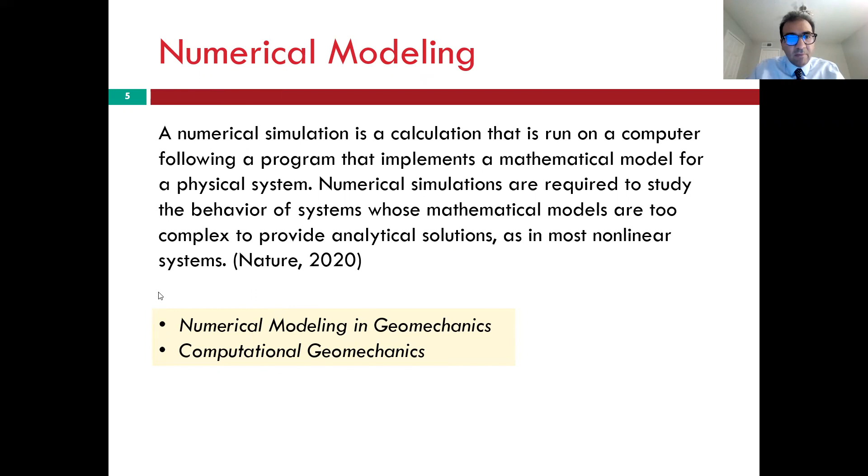So numerical modeling is basically computer simulation. So using computer programs to simulate a physical system, and then by simulation of that physical system in computer, we can study the behavior of systems and proceed with some types of analytical solutions. Once we are talking about numerical modeling, specifically in geomechanics, sometimes we also call it computational geomechanics. So all of them follow the same procedure and methodology.

So once we discuss numerical modeling, we mostly deal with three aspects during any investigation. The first aspect is the physical system. The physical system is the actual realistic system that we are interested in modeling, for instance, an underground reservoir or a wellbore. Then we have the mathematical system. The mathematical system uses mathematical equations, closed-form solutions to predict the behavior of any physical system

and any physical component. And then we have the numerical system that, as we mentioned, uses computer simulation for studying and analyzing a physical system. And the application of numerical modeling, we can categorize into three different areas. In general, we use numerical modeling for interpretation of a system. So study the system and provide interpretation of its behavior. We can use it for design, obviously. So let's say design of the wellbore.

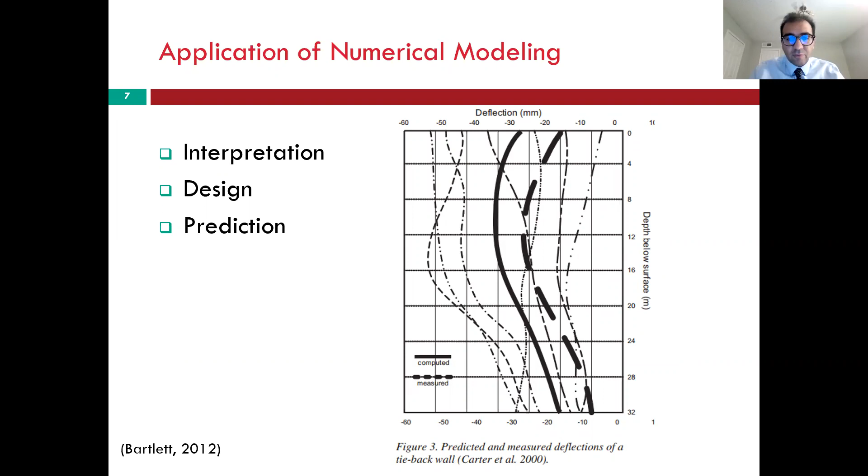And one of the things that we need to understand and make sure that we consider is the idealization of field conditions in numerical modeling. So in many cases, obviously, any field model, any realistic model, has a variety of complexities. The reason is because we live in a world of complexity. We live with complex systems. And therefore, we need to deal with these complexities, obviously.

So for dealing with these complexities, we need to use some level of idealization once we want to do a numerical model, because we are not able to develop a system that fully models the whole complexity of the system. So to some extent, we do some idealization.

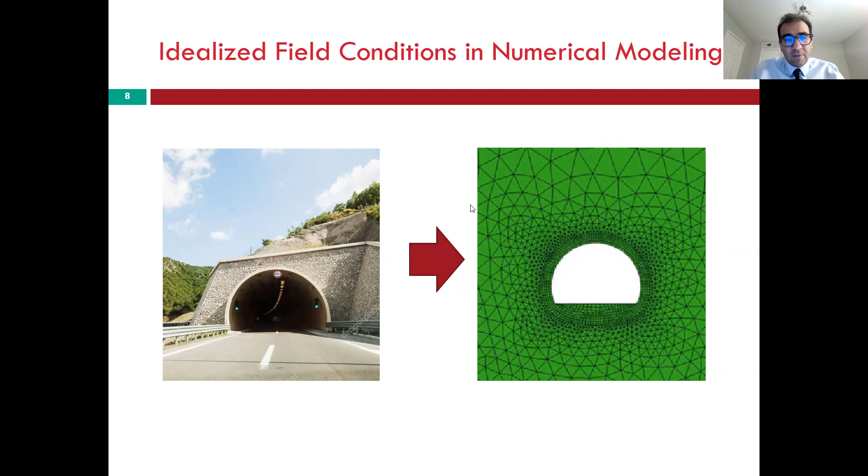So the goal of this seminar is to provide a brief overview of using these numerical modelings for geomechanics simulation. Obviously, we are not going to get into details of all these different types of procedures, and the topics that we are providing in this seminar are very, very broad and extensive, and obviously we cannot fit the whole subject into just one seminar, but we just try to get a feeling of these different methodologies and approaches for geomechanics simulation.

So in any case that we want to run a numerical modeling for the geomechanical simulation, we have different steps for that. These steps start from the idealization of the field condition, as I mentioned, and then choosing the numerical method and the program, the computer simulation tool that we want to use for that.

Then we need to develop the geometry of the system. And after developing the geometry, we'll develop a constitutive model. That's a model that represents the physical behavior of our system. And then assigning material properties to our computer simulation. Then any loading or boundary conditions should be applied. Initial conditions are applied. And then if we have any alteration, for instance, some type of extraction or drilling, that can also be applied in the computer simulation.

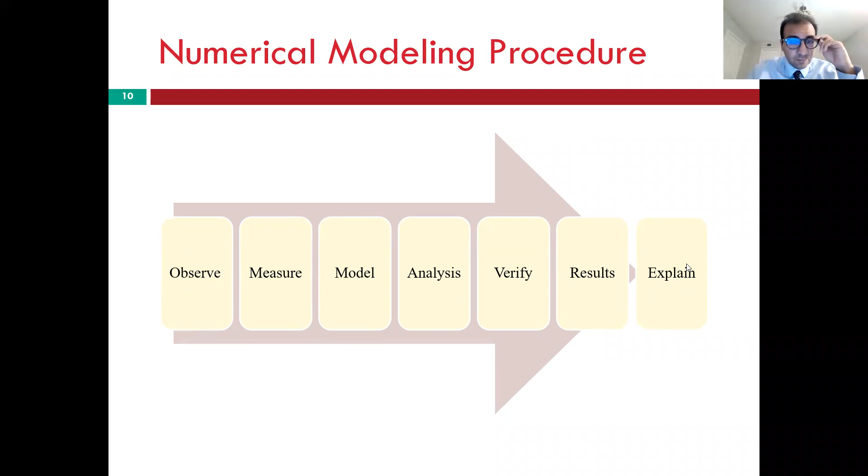The way that I organize these slides and this seminar is based on the procedure that I discussed here as well. So first, I'm gonna provide a brief review of different methods and programs that are available. Then I will talk about the geometry development and tools and methodologies for that. Then I will talk about constitutive models and some typical types of models for geomechanics simulation. And then I will provide some real case examples where these modelings have been done, providing some results that we can expect from any numerical simulation.

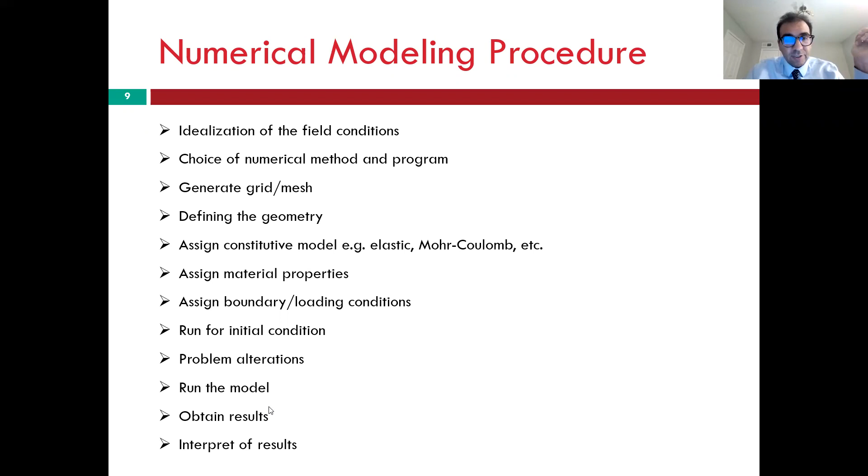So the first thing that we talk about is the methods and tools. Again, as I mentioned, this topic is very broad, and I provided here just the most important ones, but obviously there might be additional methods and tools that will not be addressed in this seminar. So don't expect all the different methods to be provided here. Our focus is more on geomechanics simulation, and as I will discuss, my main focus will be on some types of computer programs that are mostly used by geomechanics engineers and geotechnical engineers.

So firstly, let's talk about the methods, and then I will discuss the programs that are developed based on these different methods. The first method is the finite element method. This is the most common method that is used for computer simulation, not only for geomechanics, reservoirs, and media, but also for other engineering disciplines, from structural engineering, mechanical analysis, to biomedical engineering, to soil mechanics, and all different aspects of engineering disciplines.

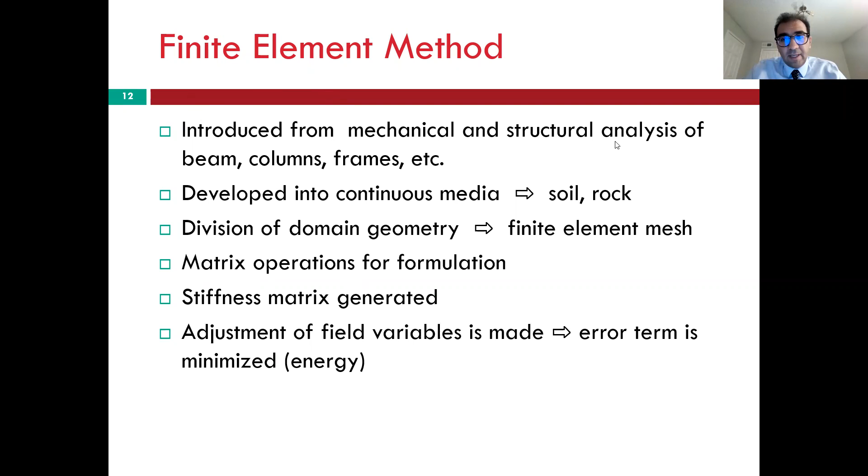The basis of the finite element method is developing the stiffness matrix of a system, and then by force equals stiffness times displacement, and by doing the matrix calculation, we can analyze and determine the amount of displacement of a system by applying the force to it. So that's the classic methodology for numerical modeling of any system, as I mentioned, from structural components to geomechanics media.

The procedure would be very similar to what I discussed for numerical simulation. So again, we'll have the geometry, material, boundary condition, loading, and solution. And once we develop the finite element model, our whole model will be divided into small elements. And then during the computer simulation, each of these elements will get a stiffness matrix, and calculations will be performed on each of these elements as a whole model.

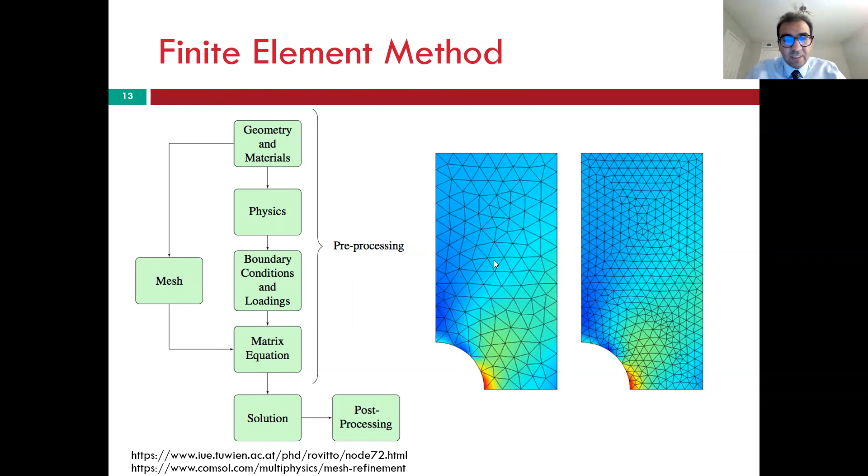One of the other methods that are more used in geo environments is called the finite difference method. That is an older and simpler technique than the finite element model. It does not include matrix calculations, and it is based on equilibrium equations between stresses, strains, and displacements.

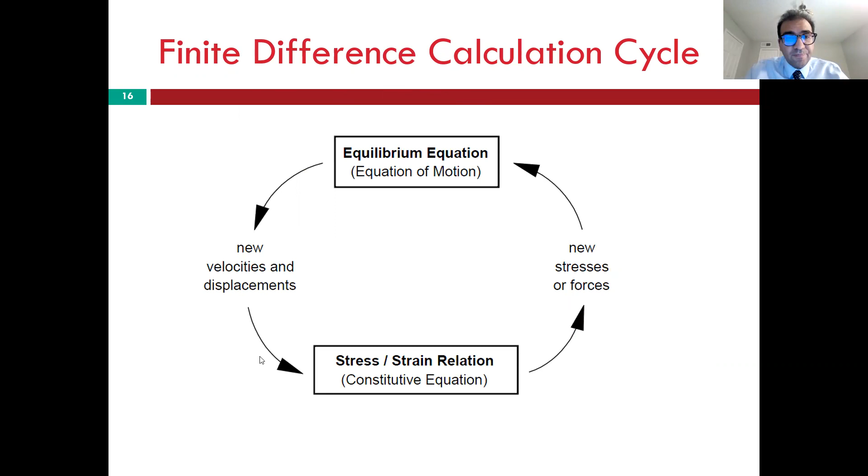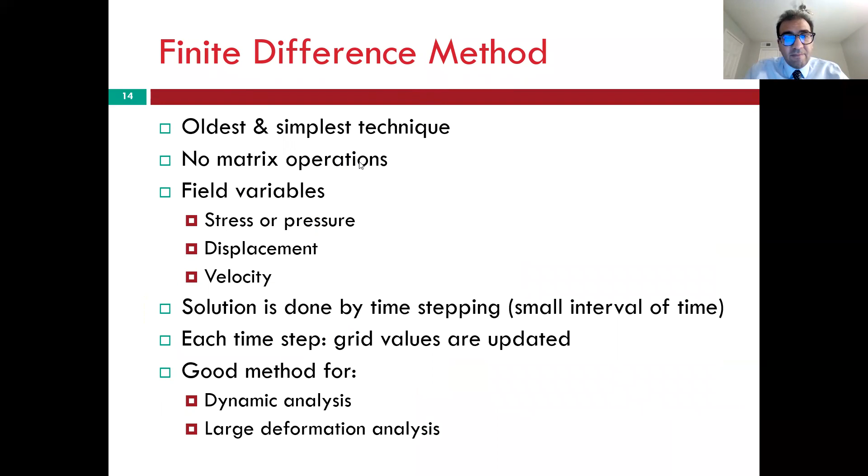One of the advantages of the finite difference method over the finite element method is that in the finite difference method, because we don't have the matrix establishment, the amount of movements and deformations that can be tolerated in the model, considering the computational time, would be higher. So although we'll have larger deformations in systems, the computational time would not be affected considerably.

That's in contrast to finite element models, where in large deformation models the computational time increases as well. So we know that in geomechanics environments, in soil and rock environments, we might have extensive deformation. And for that reason, the finite difference method would be an idealized solution for geomechanics modeling.

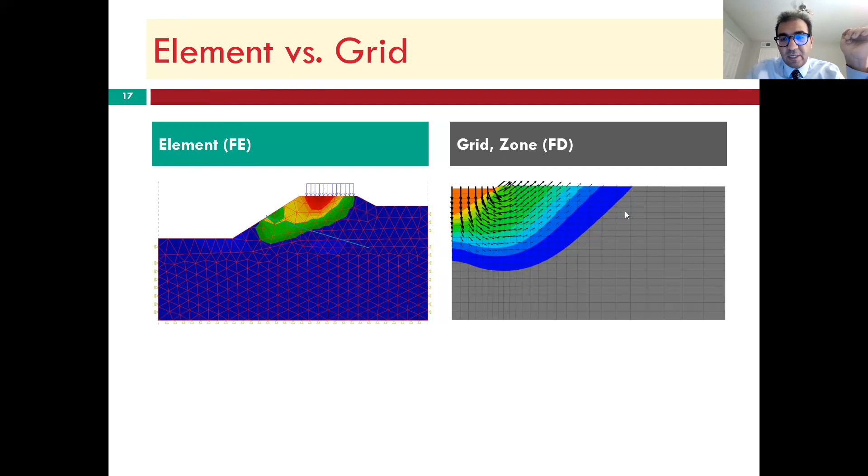And then in the finite difference model, we also have those elements, as I mentioned, in finite elements. So a finite difference model is also divided into smaller elements, and each of those elements will be analyzed in the computer and investigated in the model. However, in the terminology used for finite difference, we mostly call them grids or zones. In finite element, we call them elements. But still, elements and grids are components of a model in both FE and FD modeling.

The third methodology that is extensively used in geomechanics modeling, and more specifically in mediums that are jointed and fractured, is called the discrete element methodology. The discrete element methodology is also called the distinct element method. So this method consists of modeling blocks of materials that are separated by fractures and joints.

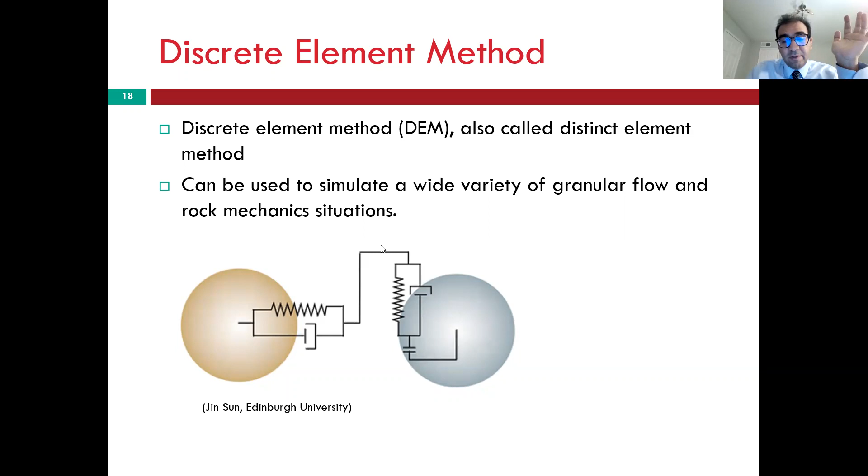And the procedure for the interaction of these elements along those joints or fractures is based on the stiffness, based on the springs and dampers that connect those different blocks or elements together. And by these springs and damper simulation, we can simulate the fractures and the joints between these elements.

Another categorization for the methods is called the hybrid methods. So hybrid methods basically include methods that combine the different methodologies that I mentioned, for instance, discrete element with finite difference.

So one important note here, comparing the discrete element with finite element and finite difference, is that in discrete elements, we mostly have jointed and fractured components between the elements. However, in finite element and finite difference models, the whole model consists of continuous material. We don't have fractures or joints in the model.

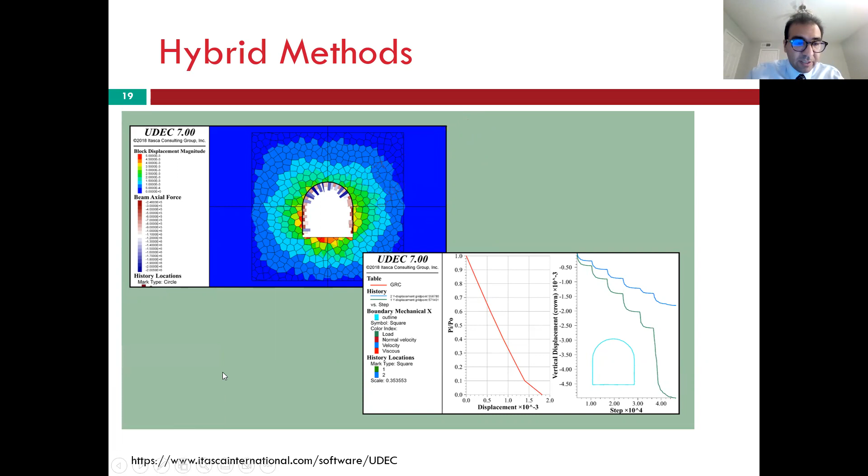We have elements, but these elements are just for computational application, and there are no fractures or joints at the boundaries of those elements. So that's an important distinction, and we'll discuss the applicability of these different systems.

So by categorizing the software packages that are available for geomechanics modeling, we provide a list of these available tools that can be used. I categorize them based on continuum modeling and discontinuum modeling. As I mentioned, discontinuum modeling consists of fractures and joints. And continuum modeling considers areas where we have continuous material without any fracture or joint. Finite element and finite difference both can be categorized under continuum modeling.

The available tools for continuum modeling for geo environments, like geotechnical and geomechanics usage: in finite element, we have programs such as Plaxis, SIGMA/W, Midas GTS, and RS. They are programs developed by different companies and entities. And then in the finite difference model, we have FLAC and FLAC3D as two powerful tools for that.

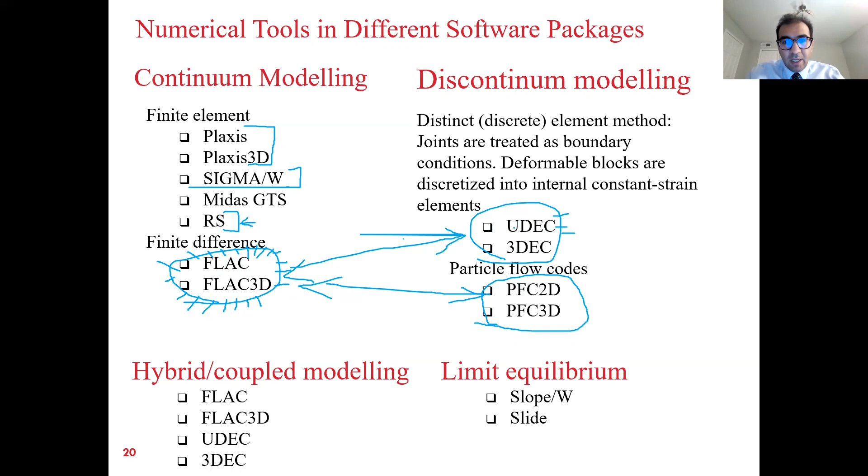And for that reason, in this seminar, I'm mostly focused on the programs developed by Itasca, and I will provide examples of geomechanics simulation and analysis with these programs. I will provide more information about FLAC and FLAC 3D, as well as UDEC and 3DEC. PFC I will talk less about, because it is mostly used for granular and particle analysis and is a very specific program, but UDEC, FLAC, and FLAC 3D are more common for geomechanics analysis.

So categorizing these Itasca tools, for continuous modeling we have FLAC and FLAC 3D. For discontinuous modeling, we have UDEC and PFC. UDEC and 3DEC are used for block modeling. PFC and PFC 3D are used for particle modeling. This is a nice and interesting overview comparing the different Itasca tools.

So let's just start from UDEC and 3DEC. As you see, we have these blocks of rock that are modeled, and the fractures between the rocks can also be modeled in UDEC and 3DEC. The difference is UDEC is a two-dimensional program and 3DEC is a three-dimensional program, so you can develop three-dimensional models with more geometrical complexity. PFC 2D and PFC 3D, as we see, are used for granular and particle analysis.

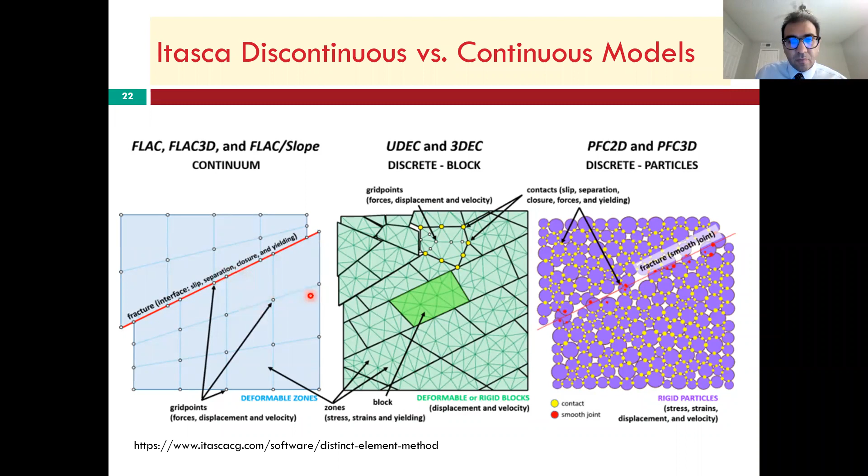Here is also an example in Itasca programs that I discuss here. There are options to combine the tools that each of these programs use, because obviously they have been developed by the same provider. So there are tools that you can use to couple these different analyses together.

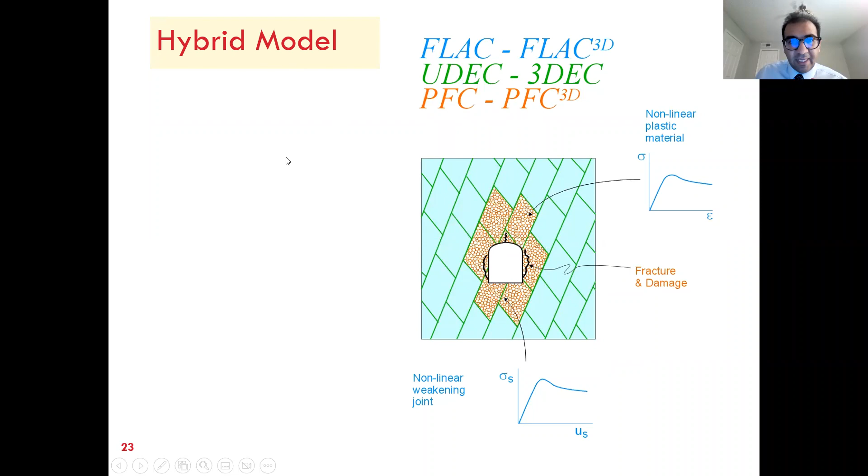Okay. So I provided the different categories and introduced these available tools for study. Now, I'm going to provide a quick introduction of FLAC, FLAC 3D and UDEC, and just provide the capabilities of these.

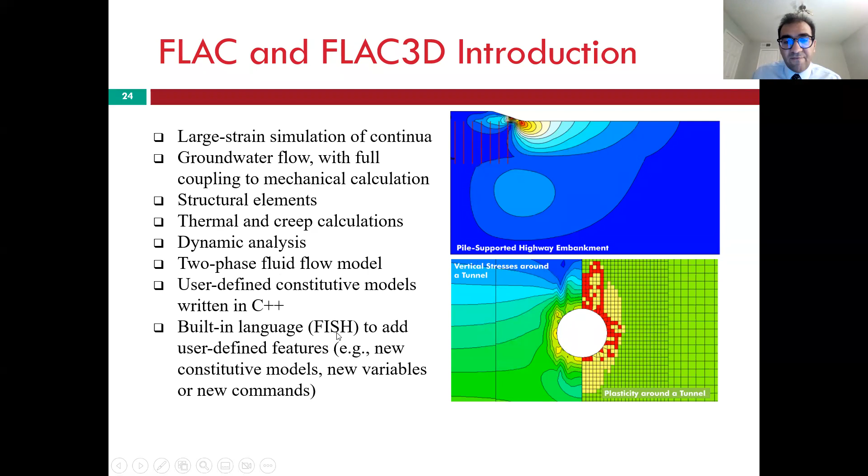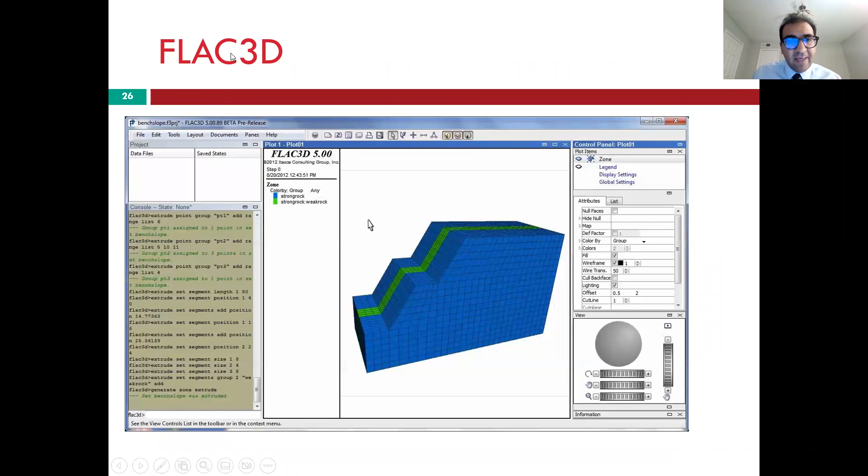FLAC, as I mentioned, has both two-dimensional and three-dimensional options. There are tools to simulate and analyze thermal and creep behavior. And for more user-specific calculations, we can also connect them with C++, Python or FISH programming languages to develop specific cases. Just an overview of the software for FLAC two-dimensional, and then FLAC 3D, where we can develop three-dimensional models.

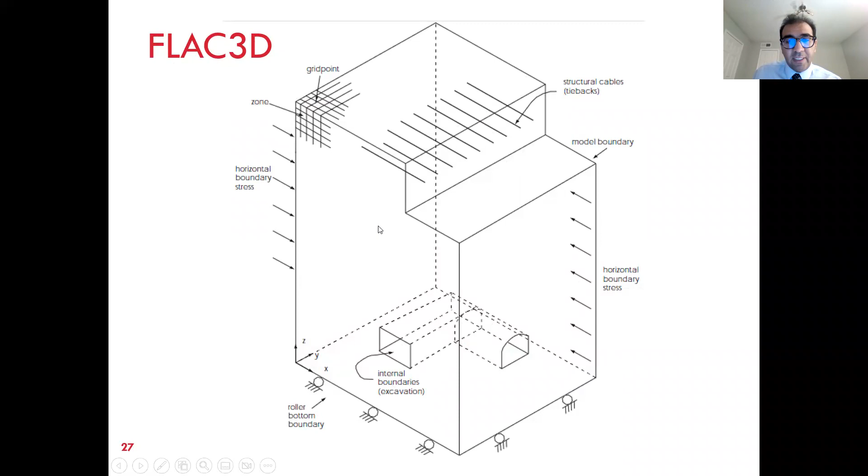There are a couple of different features that can be developed in FLAC 3D. As we said, the model is based on zones or elements. We have boundary conditions. We can have structural elements that can be used for any type of simulation. We have internal alterations such as an underground mine or a wellbore drilling inside a geomedium.

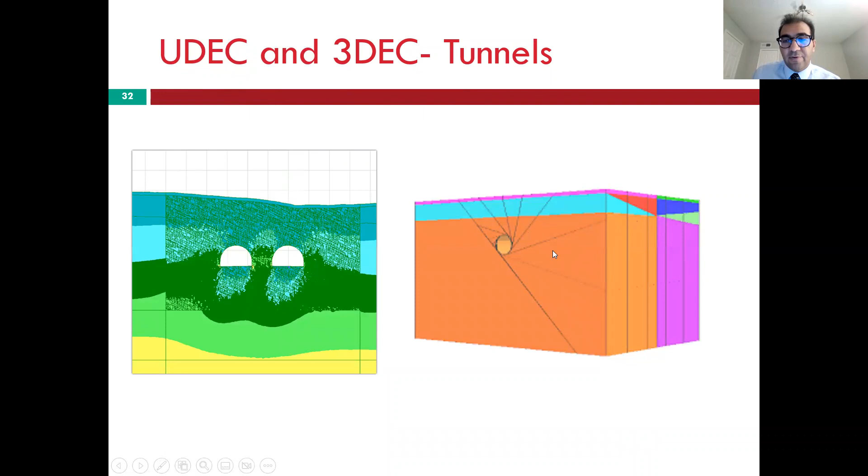Then UDEC and 3DEC, as I mentioned, are used for fractured components, and they have different capabilities, from geomechanics modeling to earthquake engineering to dams, foundations, etc. UDEC, as I mentioned, is a two-dimensional version. The environment is very similar to FLAC, and then 3DEC, I have it here. 3DEC is the three-dimensional version of UDEC, with which you can simulate systems that have fractures in them.

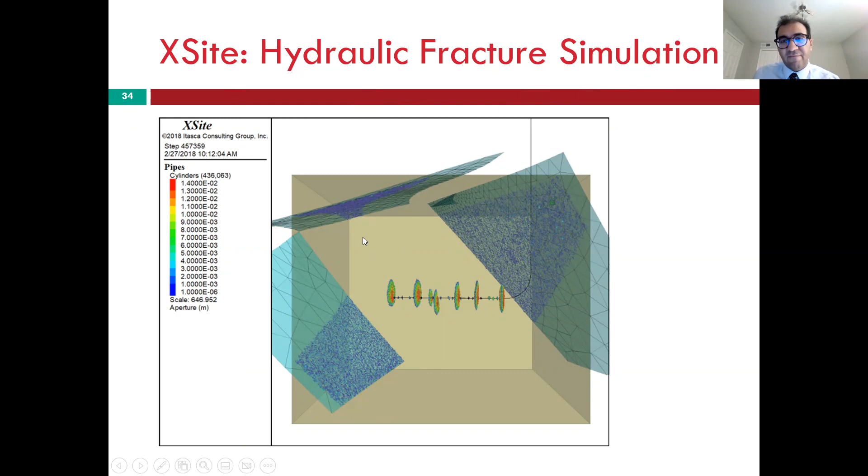PFC and PFC 3D, again, are for particle simulation. And then there is another program called XSite, also developed by Itasca, that is specifically used for hydraulic fracturing simulation. We can also use UDEC and 3DEC for hydraulic fracturing as well. I will discuss the differences of these two tools for hydraulic fracturing simulation, but XSite is specifically developed for the hydraulic fracturing case.

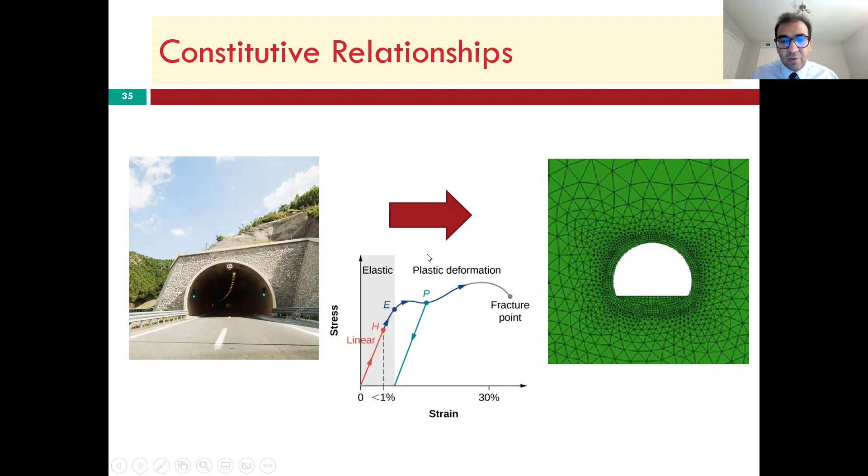Okay, so I provided the tools and the methods, and now if you recall the procedure for analysis, after choosing the tools, we get to the constitutive relationship, which is a mathematical model that we use to simulate a real material. So we have a real material in the world, such as rock or soil. And when we want to simulate it in a computer, we need to establish a mathematical relationship. That is called the constitutive model.

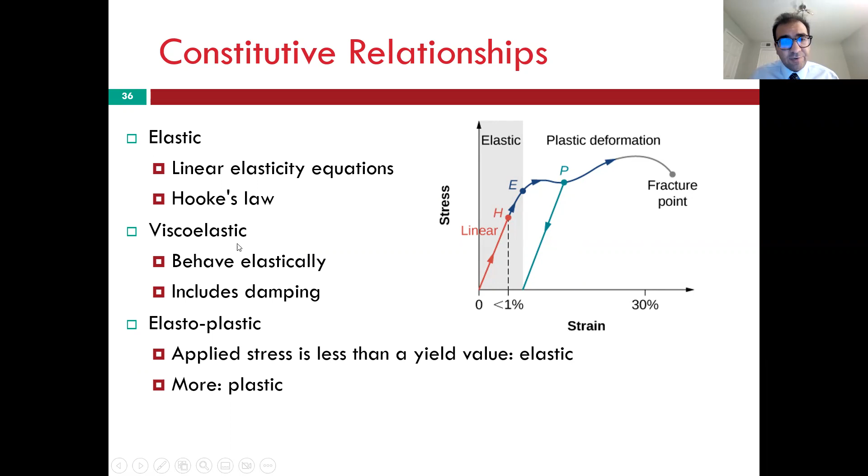Depending on the type of material that we model, we have categories of constitutive models: elastic, viscoelastic, and elastoplastic. And we have a wide range of constitutive models that can be used for geomaterials. Depending on the type of rock or soil that you are studying, you can utilize different constitutive models. One of the basic and common constitutive models used for soil and rock is Mohr-Coulomb. And then we have more specific constitutive models as well.

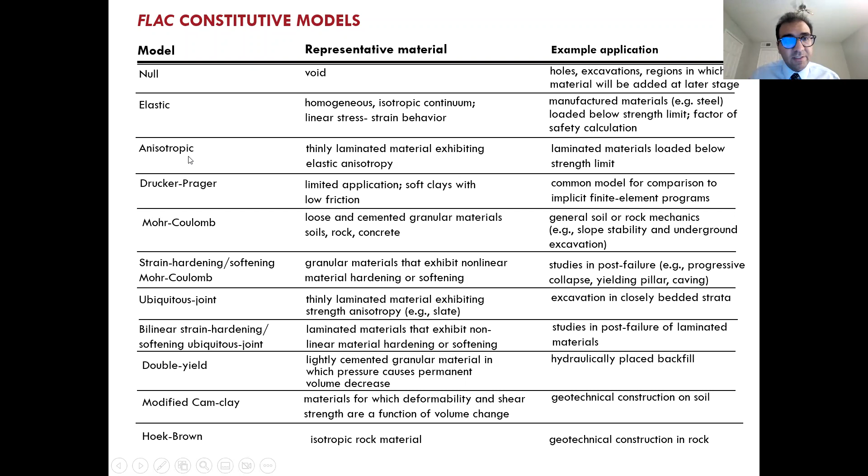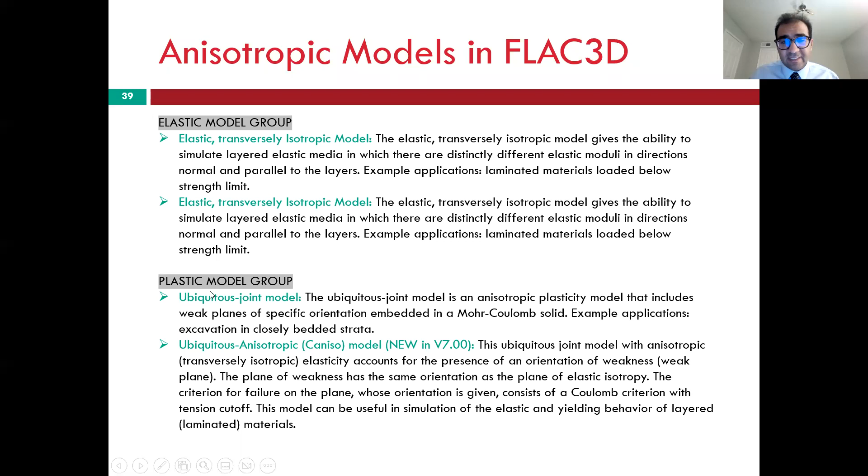One of the interesting things that we mostly deal with in geomechanics simulation, specifically for unconventional reservoirs, is the problem of anisotropy in the behavior of materials. So in FLAC and UDEC, we have constitutive models that can simulate anisotropic systems as well, in both elastic and elastic-plastic conditions.

The next thing that we deal with in computer simulation is the properties of the material. Properties are assigned based on the constitutive model that you choose and on the values you get from the field. Those can be results from testing of cores from the field, results of geophysical study and analysis, or other methodologies that we use to determine the properties of the different stratifications of the ground.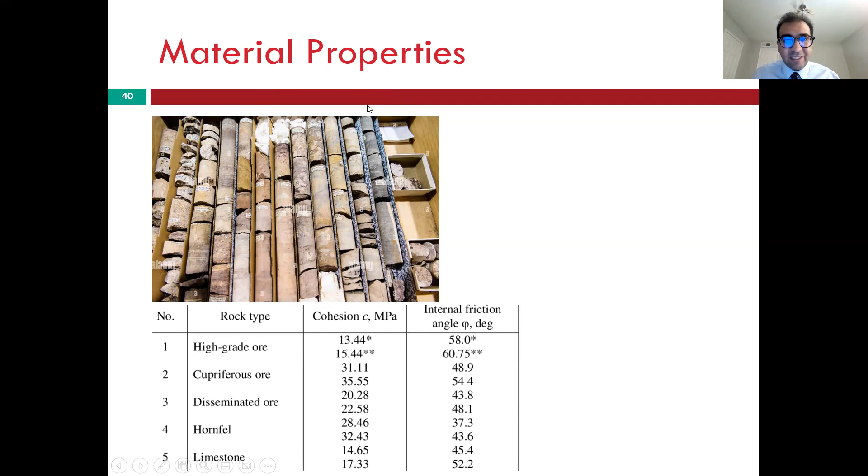Okay, so you see that I just give an overview of these methodologies. The next thing that we deal with in numerical modeling is the geometry development.

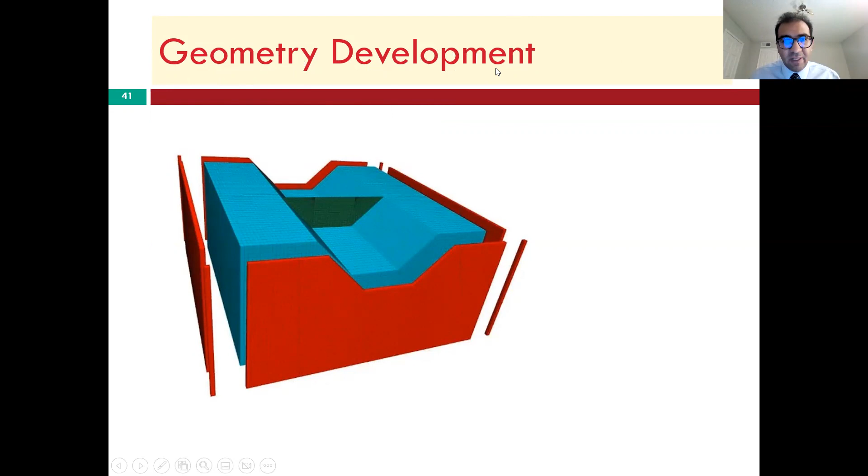In FLAC and Itasca-based programs, there are different methodologies to develop the geometry. If you are doing a two-dimensional model, you just have a cross-section of the model and you have a two-dimensional geometry to develop. Once you want to develop three-dimensional models, you have more complexities, obviously. One of the methodologies is called extrusion, and that's basically simulating a cross-section and extruding that over

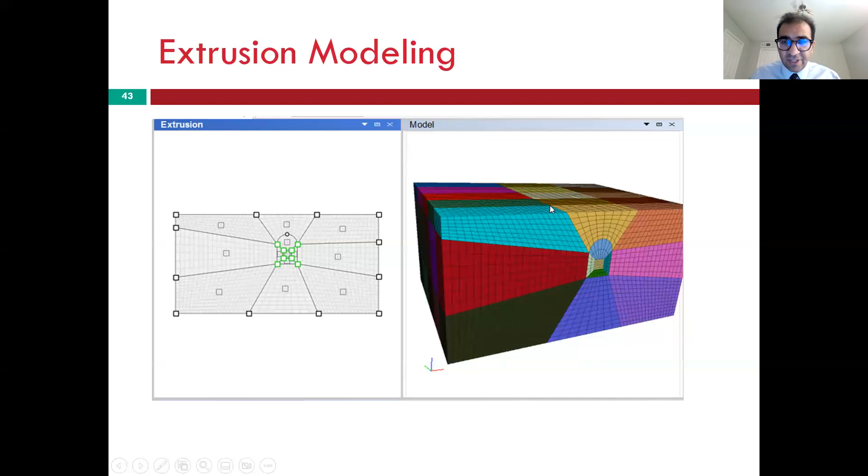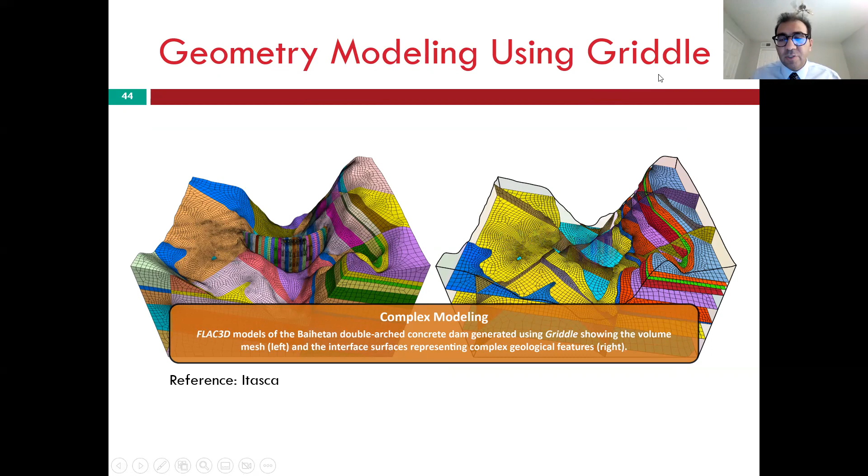the third dimension. And then we have the availability to develop very complex geometries in FLAC3D, 3DEC, and PFC3D. There is another software called Griddle, also available from Itasca, that is used for complex geometry development. We can also always use programming languages like Python or FISH to include complexities, maybe from a database of GPS points of a surface, for example. You can import that database to the model and develop your geometry of interest.

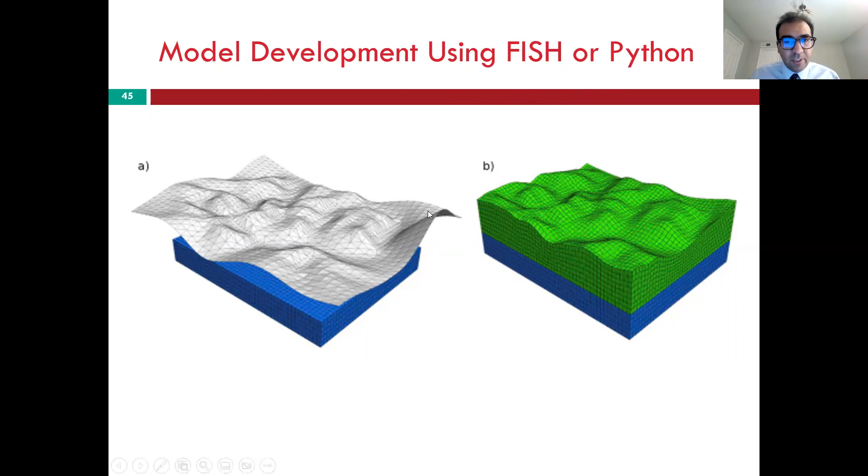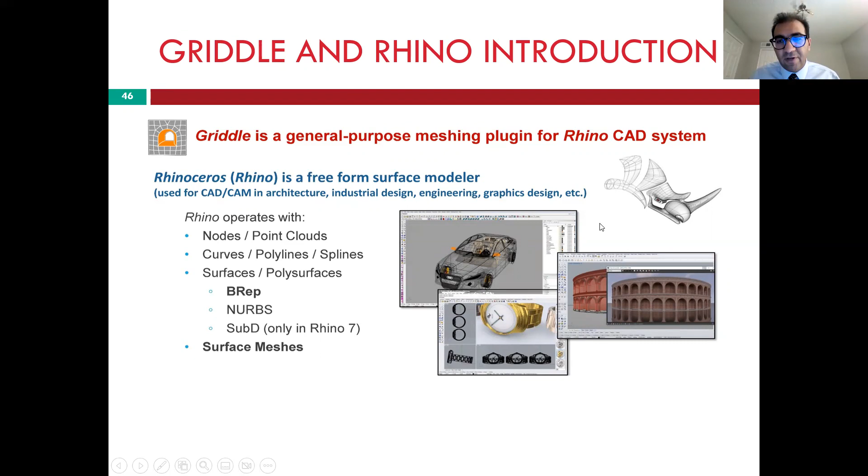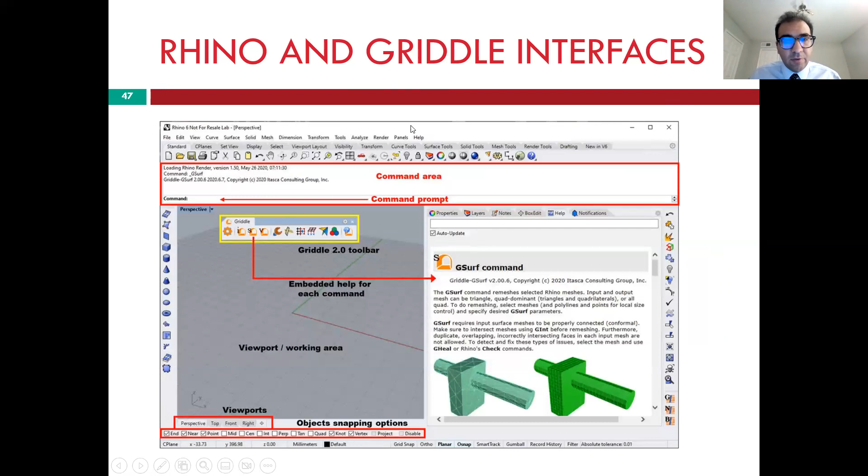More specifically, with regard to Griddle, it's actually a plugin that is connected to Rhino. Rhino is a graphic tool for developing three-dimensional models. So what you actually do is use Rhino, which is separate software, to develop your three-dimensional model, and then you use the Griddle plugin that connects the Rhino model to your FLAC3D model, for instance. Then you can import the complex geometry you developed in Rhino to FLAC3D and analyze your model there.

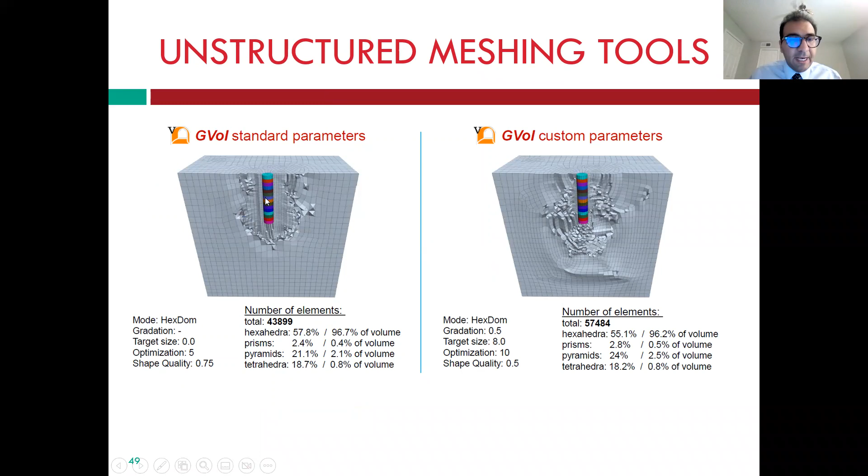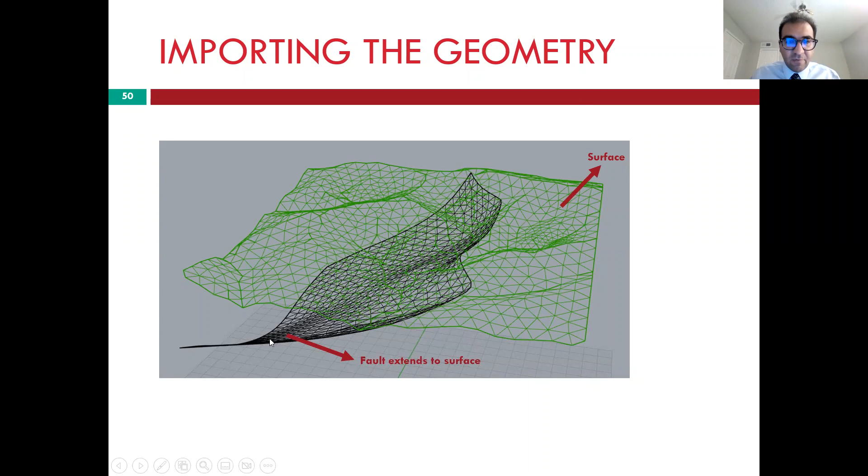We have different options for Rhino and Griddle. For instance, you can have different types of meshing, fine meshes around a wellbore, for instance. We can also use that for complex fault systems. Let's say this is a fault of an underground reservoir that is developed in Rhino and then can be implemented in FLAC3D. Okay.

So, that being said, what I provided from the beginning of this seminar to this point was an introduction to numerical modeling, a very quick review of the tools, some review of geometry development, and the constitutive model and properties. These are mostly the aspects that you deal with in geomechanics simulation. From here, I'm going to describe some examples of wellbore stability and other examples in geomechanics simulation. So I start from wellbore stability analysis.

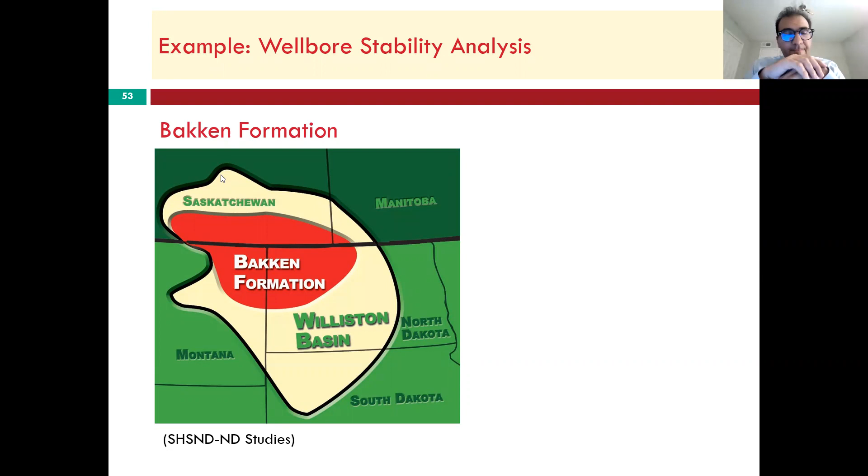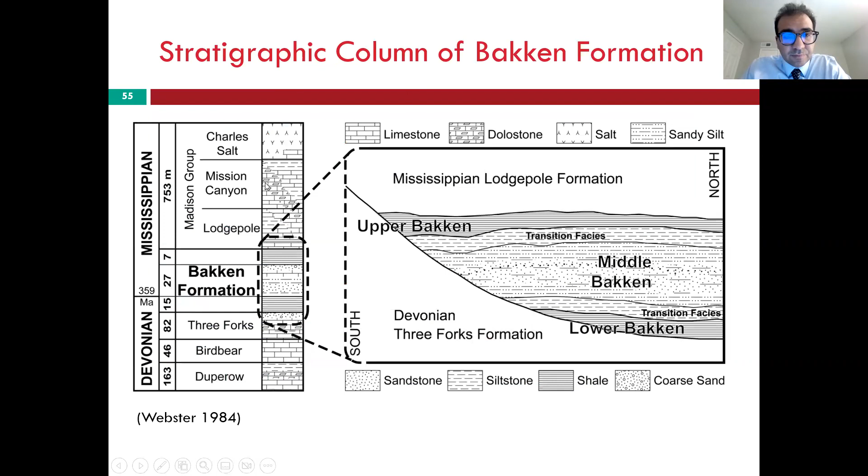One of the cases that we studied as a consultant is wellbore stability analysis of the Bakken Formation, located in North Dakota and other surrounding states. It's an unconventional reservoir consisting of different stratifications, mostly an upper shale, a middle sandstone, and then the lower shale. This study included geophysical data that we extracted from the wellbore, and using those geophysical models, we were able to determine the in situ stresses as well as some of the properties in the model.

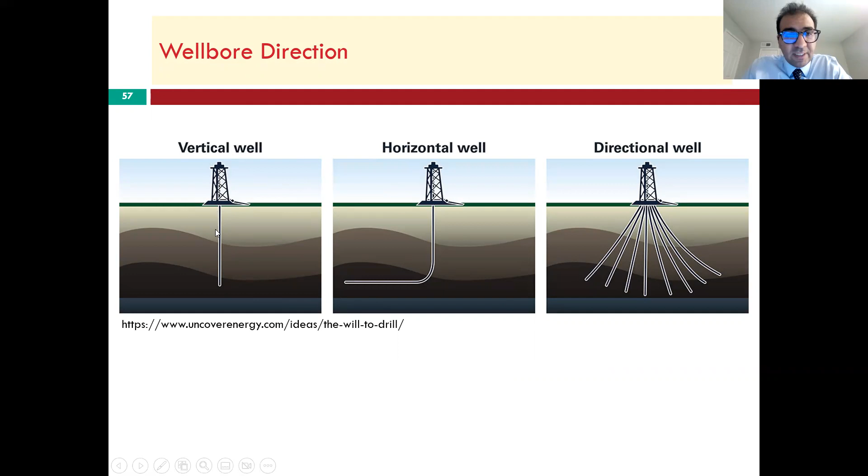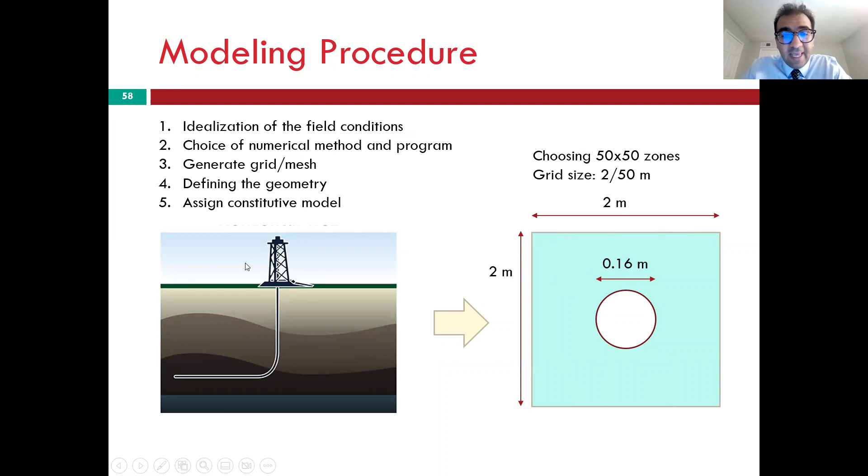We also studied different wellbore stability cases with respect to the direction of the wellbore, for instance, the vertical wellbore, horizontal well, and also the directional well. The modeling procedure consists of the same procedure that we discussed earlier, from idealization of the field condition to geometry development, constitutive model, and analyzing the system. We had the opportunity to do both a two-dimensional analysis of a cross-section of a wellbore, as well as the whole three-dimensional model of that wellbore and the surrounding environment.

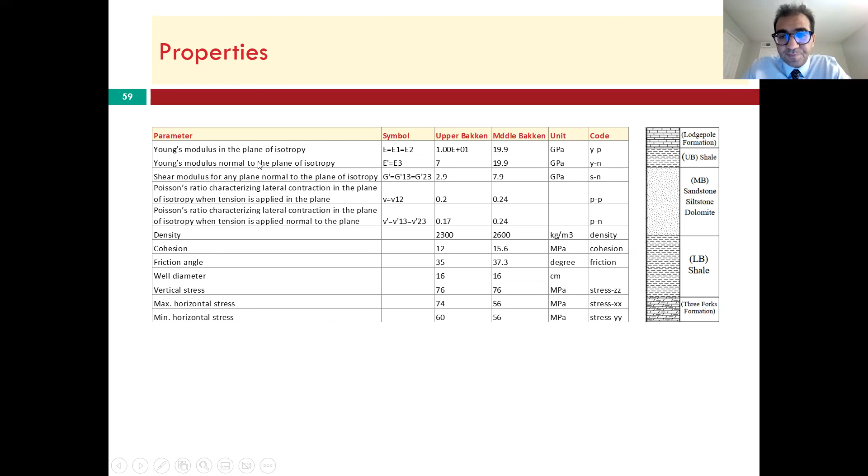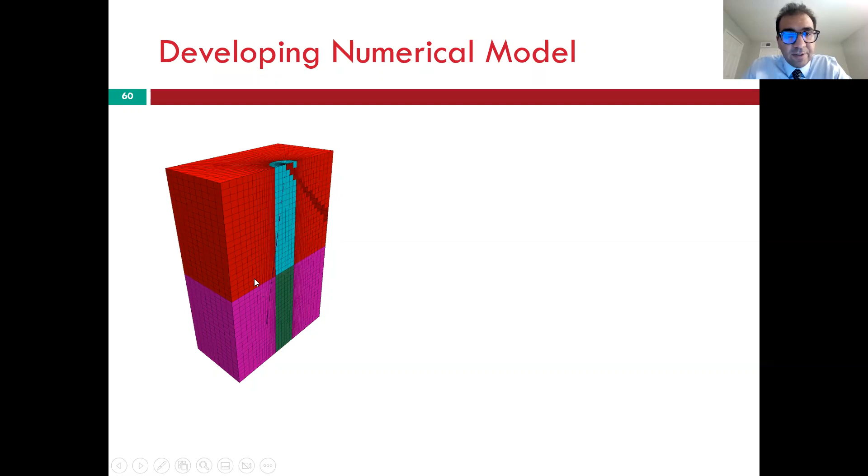As I mentioned, the purpose of this seminar is just showing the tools and available resources, correct? I'm not going into details of these procedures. I just want to provide a sense of what availabilities are there, and what tools are available that we can use.

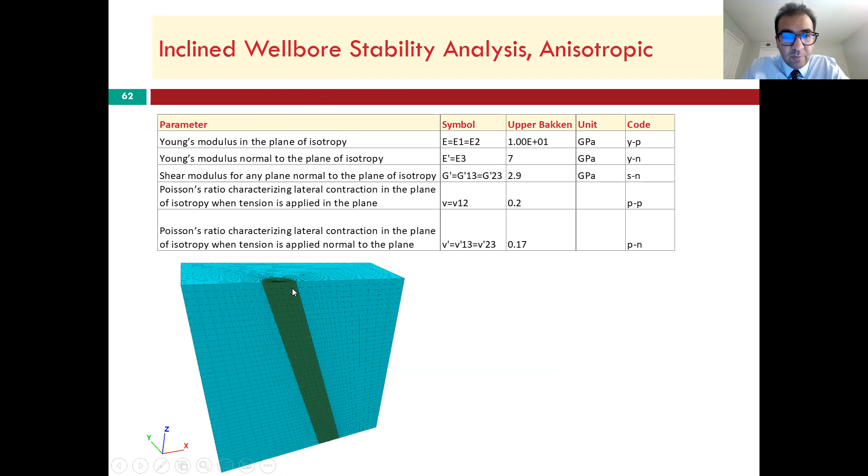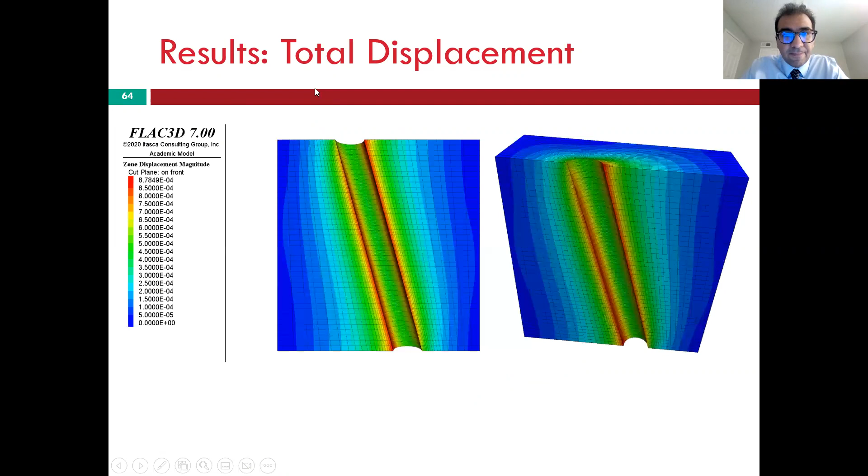We were also able to run models of inclined wellbores and study the model response, for instance, against a well drill. These are the displacements around an inclined wellbore. We can also study the stresses around the inclined wellbore as well. Another study that we did was evaluating the stresses around a closed-end wellbore. You see this is a cross-section that shows the end of the wellbore, and we can study that to evaluate the stress state as well as the deformational state at the end of the well.

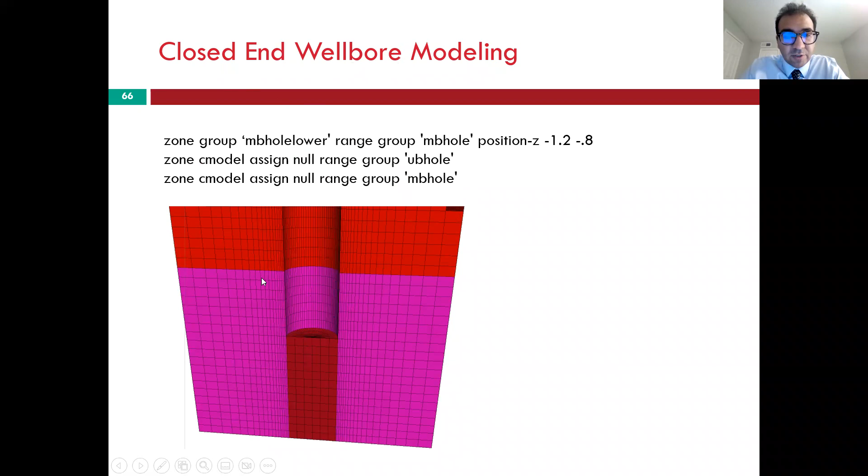Okay. Another tool for analysis that we have basically includes the flow-mechanical analysis. So using flow in our analysis and coupling the mechanical model with the flow. Based on that coupling, we have different types of flow-mechanical analysis in these available tools.

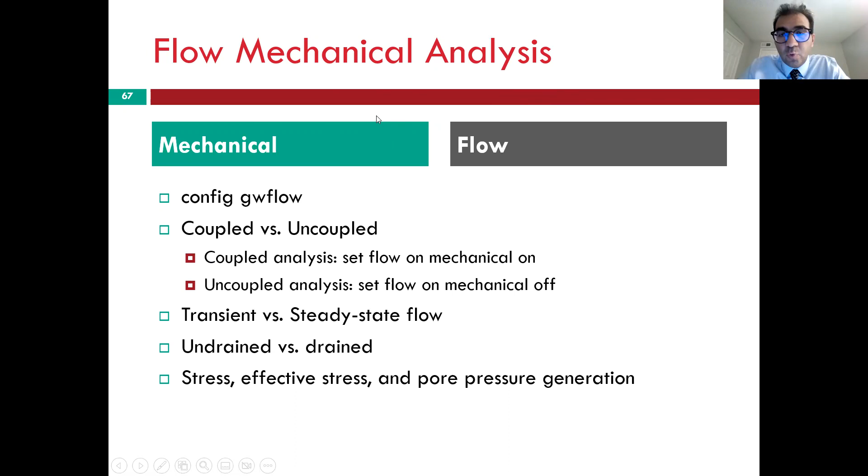And then I'm going to provide an example of how we did a coupled flow-mechanical wellbore stability analysis in FLAC. So we had material models of the system, and then we have the wellbore. And the scope of this was basically determining wellbore stability under different mud pressures. So by flow-mechanical analysis, we are able to apply the mud pressure and flow to the wellbore, and also considering the surrounding pore pressure, we would be able to study the wellbore stability at different mud pressures, and then actually use that for the design of the mud pressure that would be suitable for specific drilling.

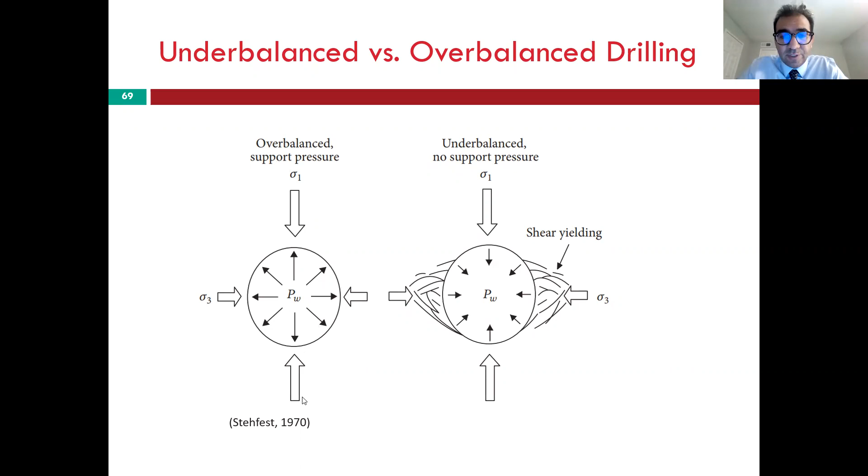So as you know, we have two different categories of drilling: underbalanced vs overbalanced drilling, and that depends on the amount of mud pressure that you apply to the wellbore, and also on the surrounding stresses, in situ stresses. So in FLAC, we are able to simulate the system and then study the behavior and the response of the wellbore based on the level of in situ stresses and the level of mud pressure you are applying.

And then by doing that, you can estimate and predict the response of the wellbore, if it's going to go to collapse or breakout condition once you have low mud weight, or if you go to mud loss or lost circulation in case you have very high mud pressure. And then you can design a system so that you get a stable wellbore.

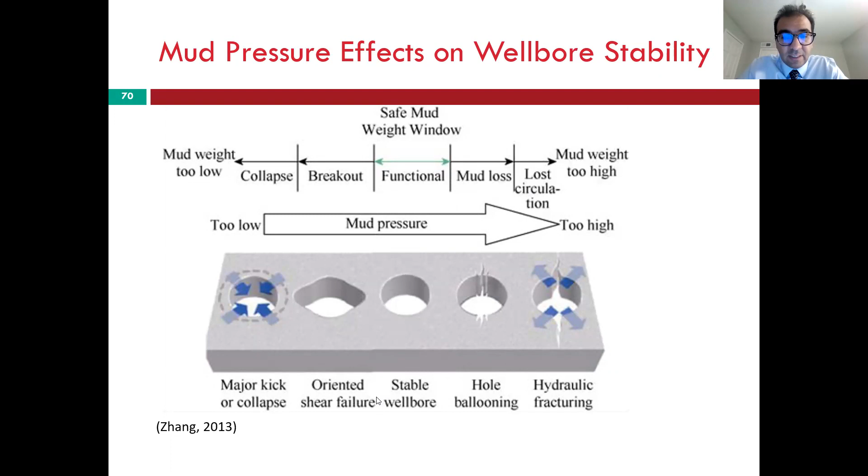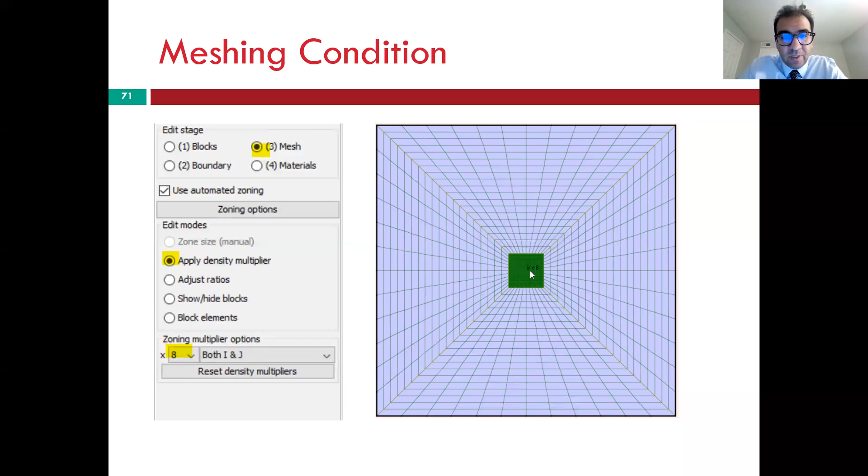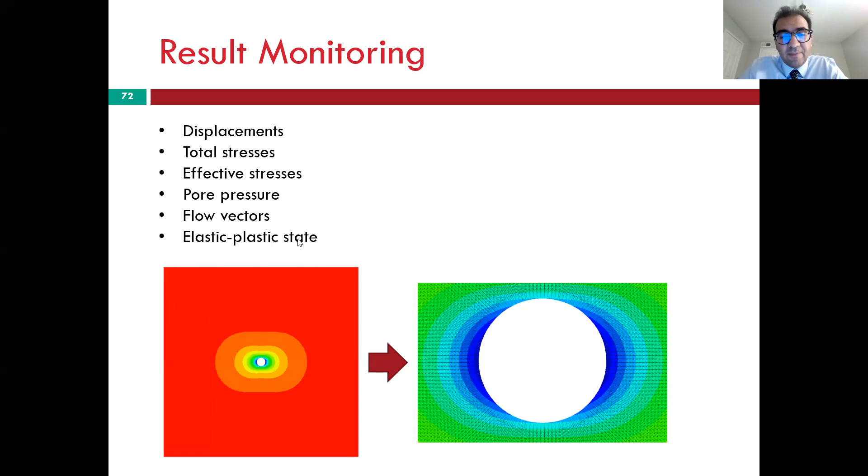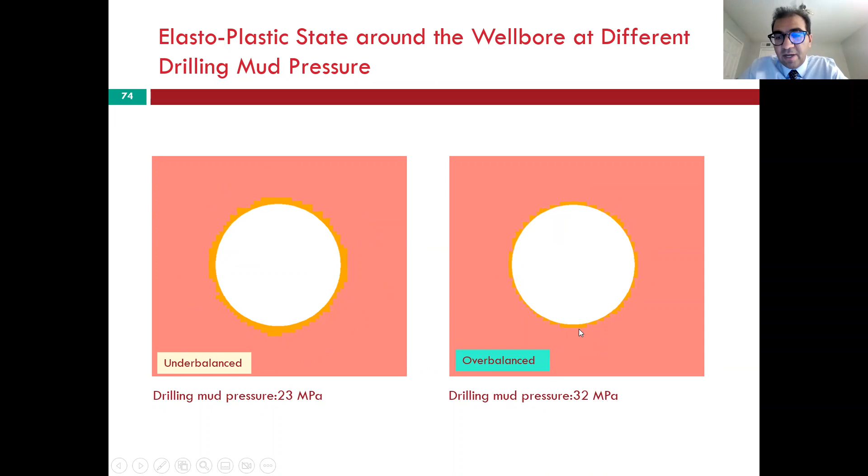So mud pressure 23 megapascal, it's relatively low. You see a significant area of the wellbore is yielded, so we'll have more displacement here. Once you increase the mud pressure, the amount of yield is going to be minimal. Here is an overbalanced drilling with a very high mud pressure and very limited yielding around the wellbore. By doing that, you can do design, and for instance, you can determine the NYZA, the normalized yielded zone area, and then use that for design of your wellbores. This is one of the examples here.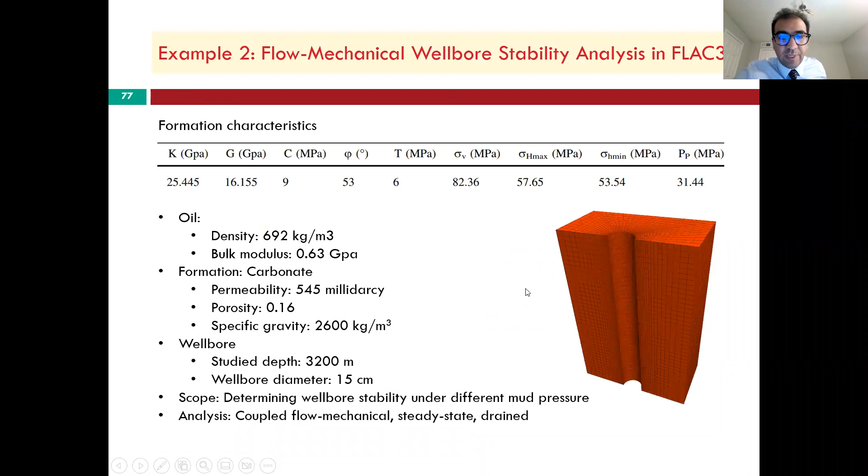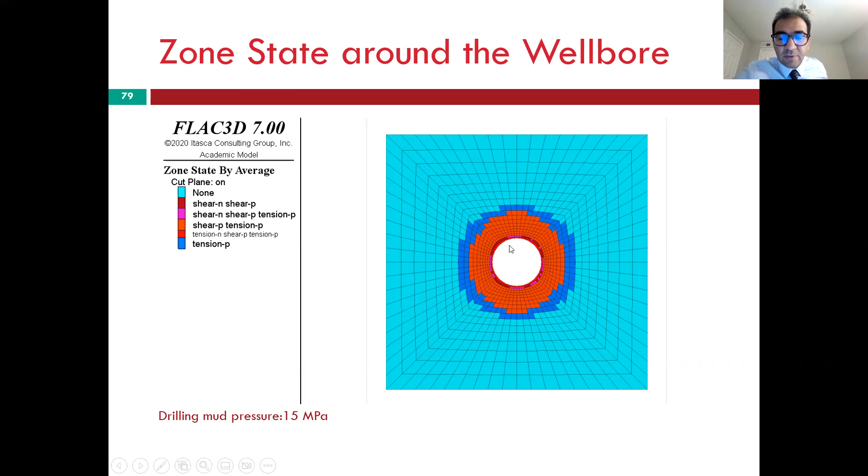Okay, yeah, that was an example showing the procedure for doing this. We can do that also in a three-dimensional model. This is an example of a 3D model of the same situation. And obviously you can also apply a structural element for casing in the 3D model. So you see again the yielded zone in the 3D model. It's ragged because the elements are large, just to have a shorter computational time. But in a real consulting case, we usually provide much denser elements here.

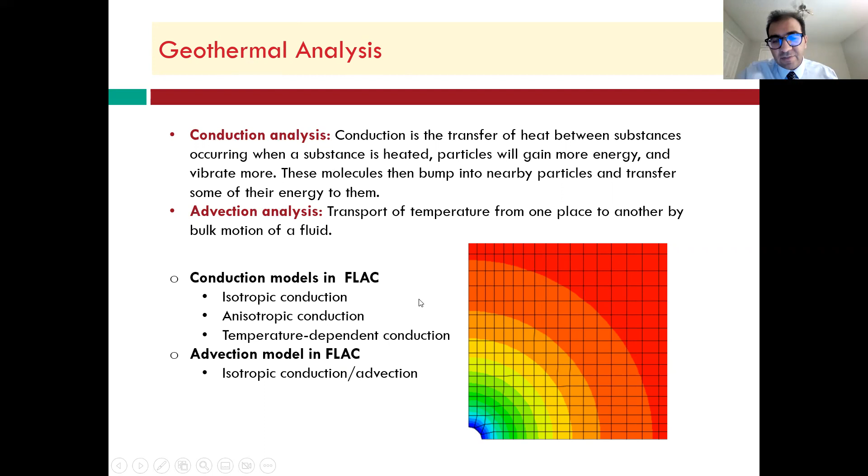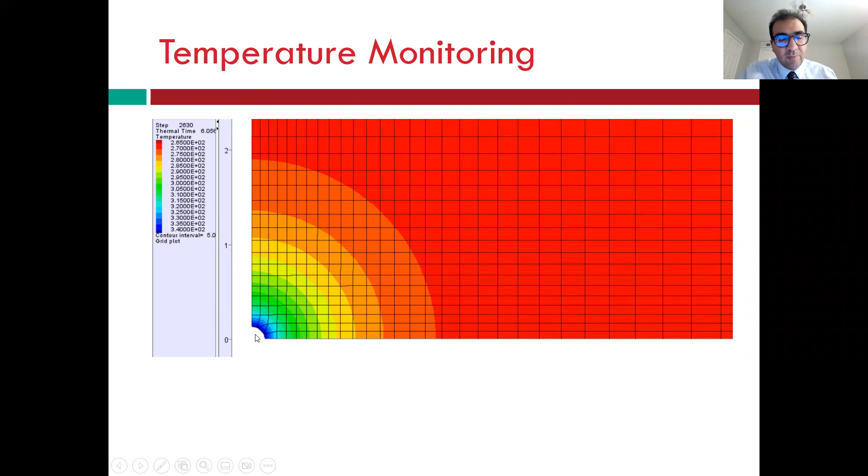Okay, so the other usage of the analysis would be geothermal analysis, where we can do thermal modeling in FLAC. Depending on the type of analysis, we have the availability to do both conduction and advection models in FLAC as well as FLAC 3D. So for instance, this is an example of a temperature analysis around a wellbore. This is a quarter of the wellbore cross section, and we can see the temperature contours around the wellbore by drilling that wellbore here, and then study the temperature variations versus the radial distance.

Some examples with regard to distinct element modeling using UDEC. So as we mentioned, UDEC is used for fault and joint discontinuities, and we can use that for the analysis here.

So we use UDEC for hydraulic fracturing applications. As I mentioned, we also have XSite. XSite is mostly used for naturally fractured reservoirs, and we can also use it for intact rock and performing hydraulic fracturing there. UDEC is mostly used for systems that are already naturally fractured, or have any other joints or fractures, and we want to apply hydraulic pressure inside that fracture and then study the behavior of the fracture once that hydraulic pressure is applied.

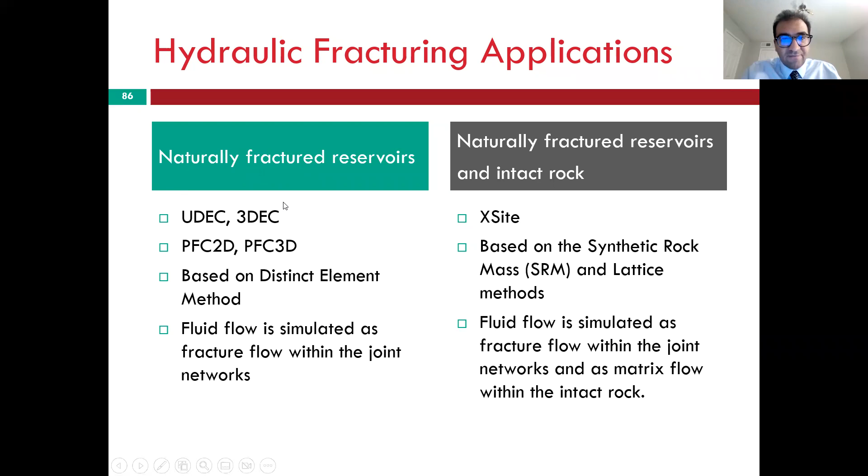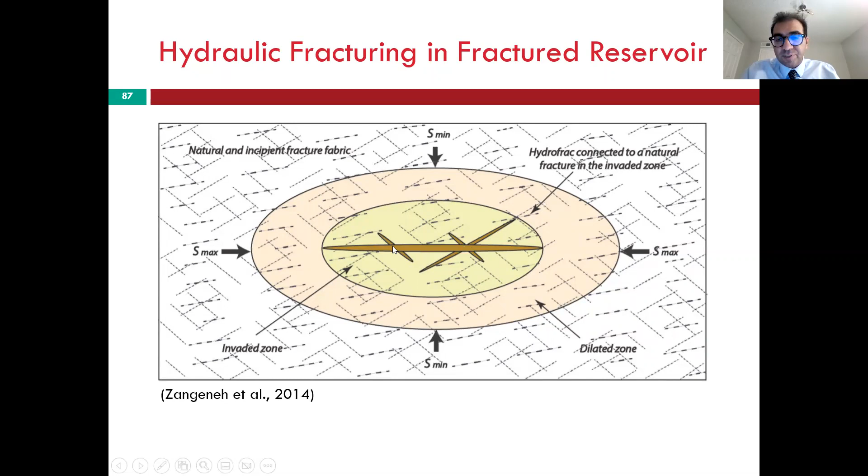So for instance, one of the applications is, we can simulate this system in UDEC or 3DEC. We have an array of fractures in the model. We have in situ stresses that we simulate and apply in the model. Then, given the state of in situ stresses, we inject a hydraulic pressure inside the fracture. Then we can study the amount of fluid infiltration into the fractures, as well as the strain condition, the movement and displacement condition of the fracture.

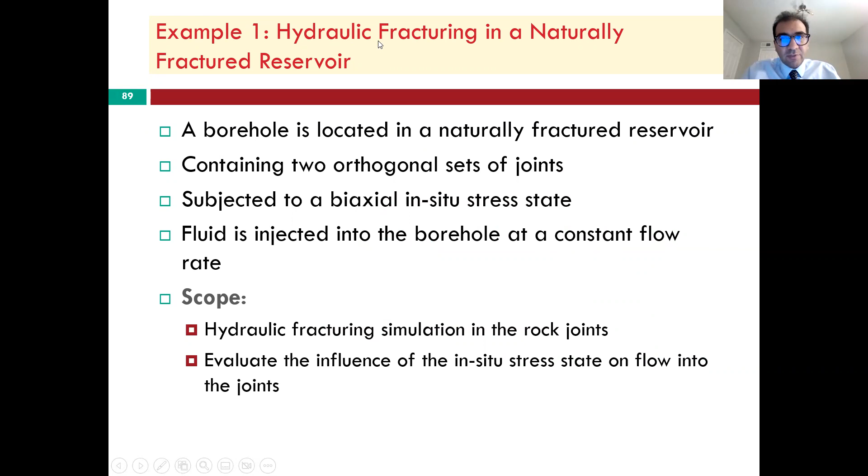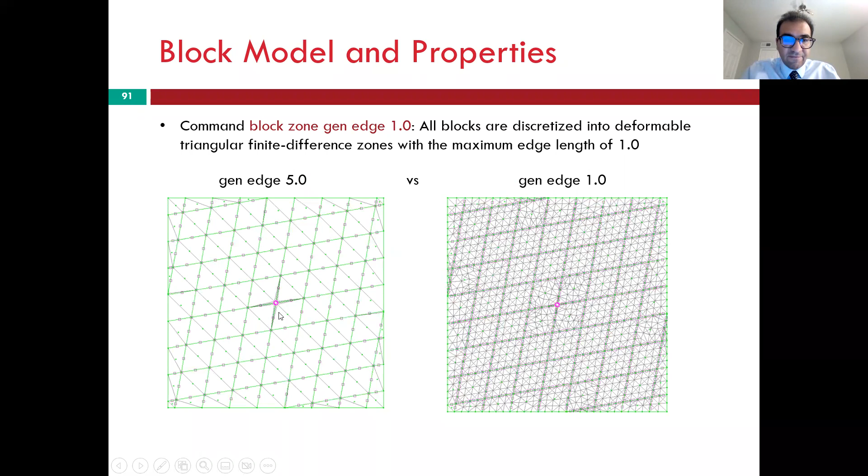So one of the examples that I'm going to show is using hydraulic fracturing in naturally fractured reservoirs. This is an example of a wellbore, basically a hole that is drilled inside a fractured zone. You see these lines are all fractures. By applying a hydraulic pressure to the internal boundary of the well, we would be able to determine the amount of infiltration of the fluid inside these fractures and inside these joints.

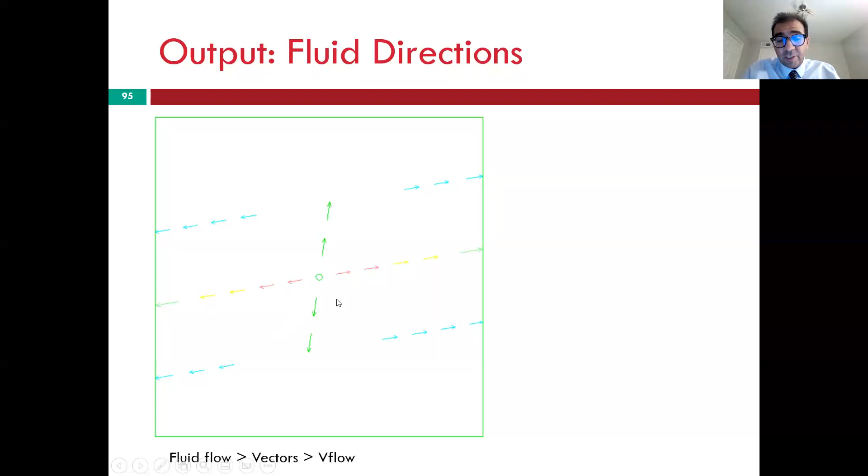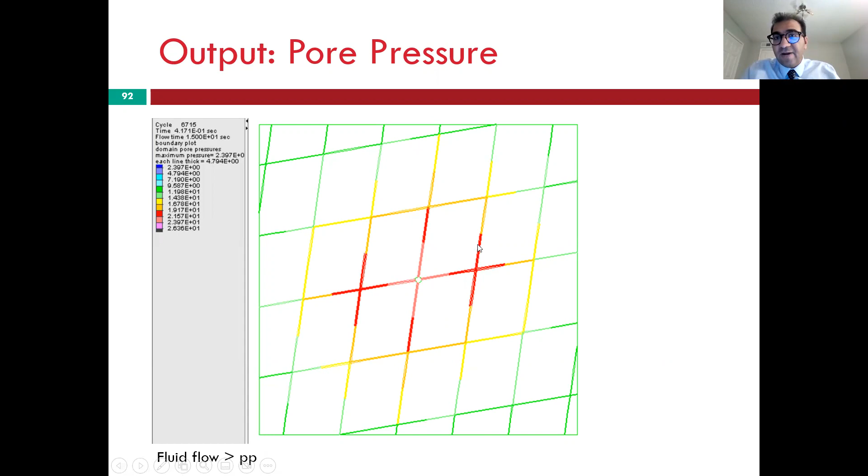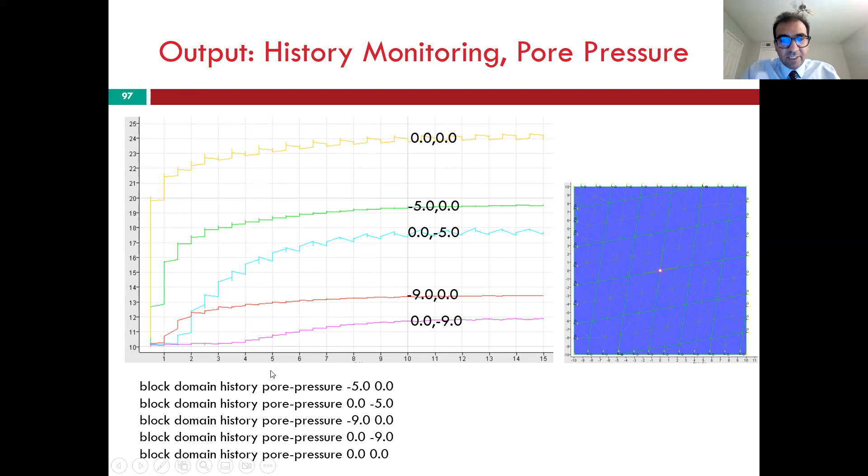These, as I mentioned, are modeled in UDEC because it has the capability to simulate an abundant number of fractures in any direction you want. Obviously, these fractures right now are ordered, but you can develop random fractures in the model based on some statistical models as well. And then you can monitor the pore pressure, for instance, at different points and develop pore pressure or any other result changes through time.

So that is basically the end of this seminar. I just tried to provide an overview of tools and methods that are available for geomechanics simulation that are used for reservoir modeling, for wellbore stability analysis, for hydraulic fracturing and fracture studies, and other applications. This mostly focused on Itasca tools such as FLAC, FLAC3D, UDEC, and 3DEC, and provided the procedures that we mostly use for consulting.